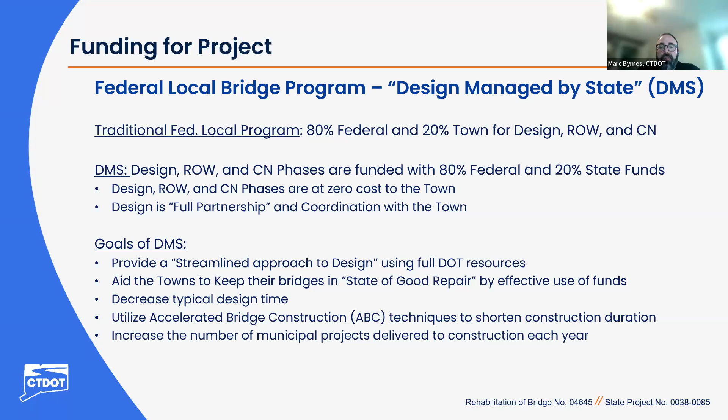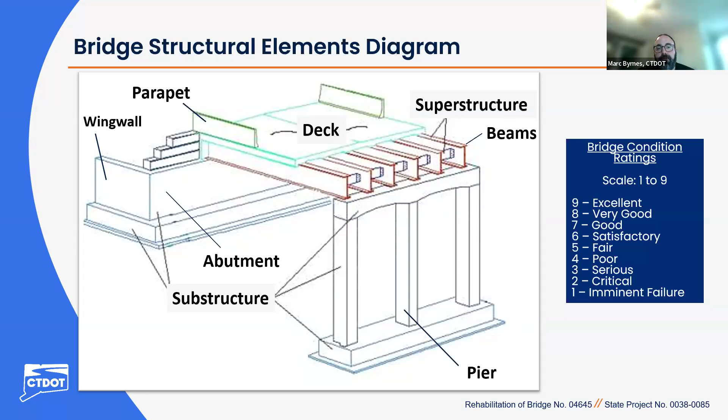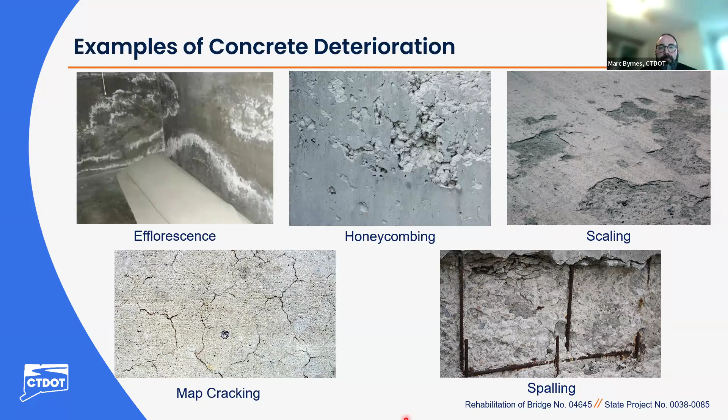I'll now turn over to Deb Richards, first selectwoman of the town of Eastford, for some remarks.

Thanks, Marc. On behalf of the Board of Selectmen for the town of Eastford, I'd like to welcome everyone to the virtual public information meeting for the town of Eastford Ashford Road Bridge Project. The town of Eastford is working in partnership with CTDOT and CHA Consulting for this bridge replacement project. CHA and CTDOT have shown open communication and a willingness to answer all the town's questions regarding this process. I look forward to tonight's presentation and open discussion. Thank you.

Thank you, Deb. I'll now turn over to Steph Dubina for the formal presentation. Steph?

Hi, Mark. Thank you. As Mark noted, my name is Stephanie Dubina. I work for CHA as a consultant liaison engineer on behalf of the Department of Transportation. This is a project that I am working on. And on a personal note, I'd like to say that I am a town resident of Eastford myself, so I am very familiar with the bridge site and the project location. I'm excited to introduce this to the community and just provide an improved bridge for years to come.

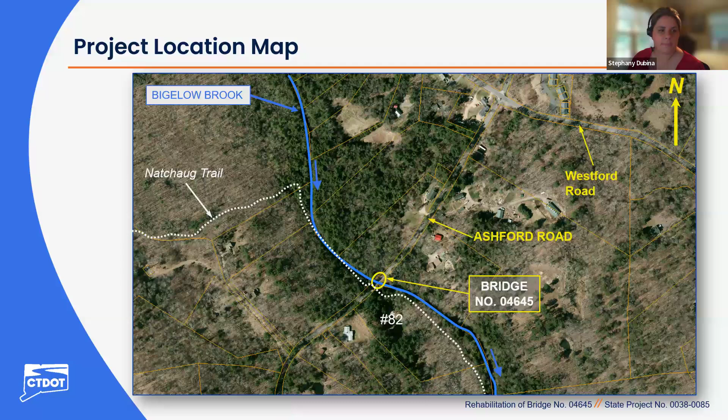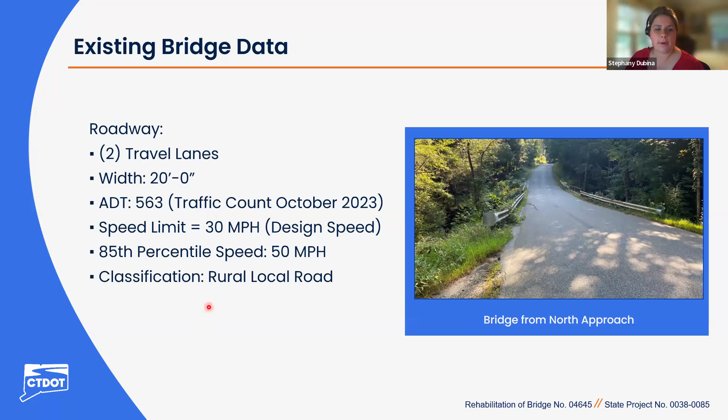With that being said, the 85th percentile speed for this location was calculated to be 50 miles per hour during those traffic counts completed last year. Finally, Ashford Road is identified as a rural local road.

This bridge was constructed in 1937, making it 87 years old. It's a single span structure with a span length of 27 feet, 7 inches. It has a superstructure comprised of steel beams and a concrete deck. Its substructure consists of stone masonry gravity wall abutments and flared stone masonry wing walls.

The bridge is considered to be a large structure because it has a watershed of 24.4 square miles, and because it's a large structure, it also has a 100-year design storm. The hydraulic clear span of a bridge is measured from abutment to abutment. In this case, the hydraulic clear span of this bridge is much shorter than 1.2 times the bank full width of the channel, which is 51.6 feet.

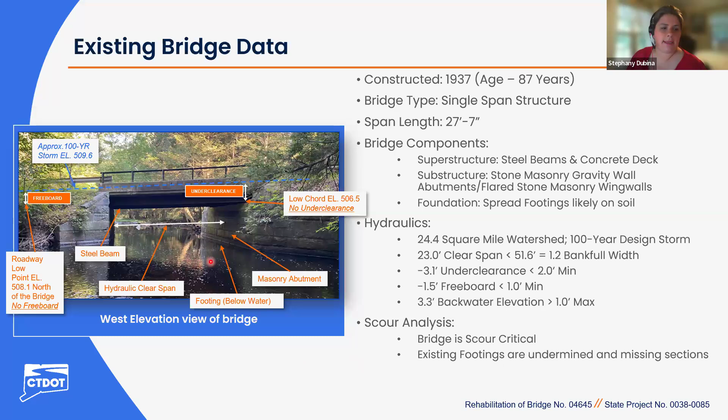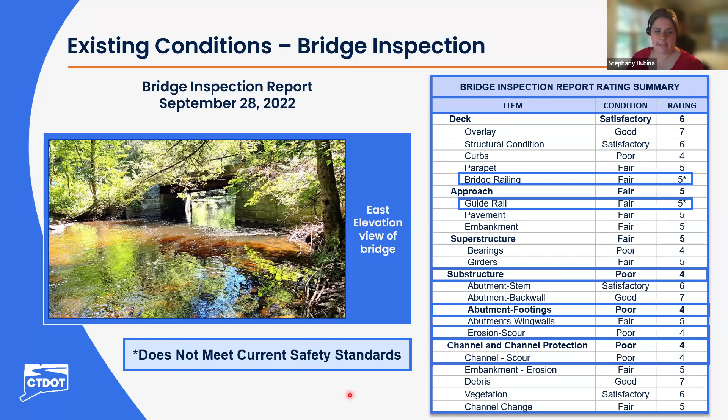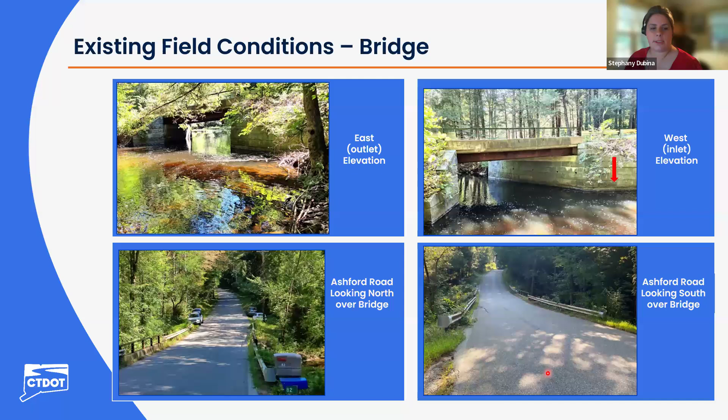This top left photo shows the underside of the bridge deck, showing the steel beams and the masonry wall abutment. This top right photo shows the deterioration of the concrete curb at the west fascia. This bottom left photo shows the north stone masonry abutment and the concrete bridge seat. This bottom right photo shows the steep southeast approach embankment, and you'll see voids within the masonry behind the wing wall.

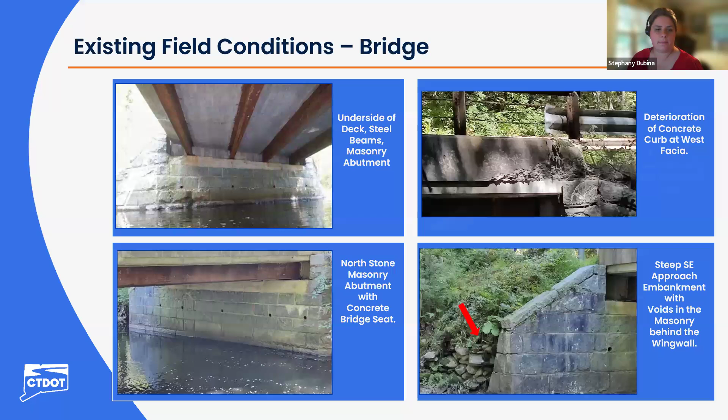This top left photo is a photo of the Natchaug Trail on the west side of Ashford Road, which runs along the southern bank of Bigelow Brook. This photo is the driveway of house number 82, which is located immediately southeast of the bridge and abuts the Natchaug Trail, highlighted with this red arrow here.

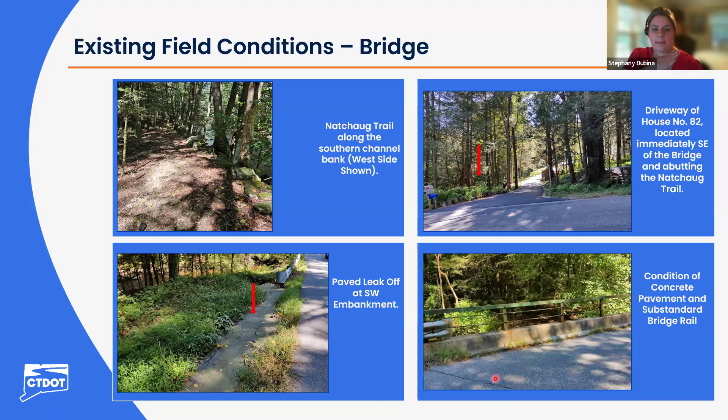This bottom left photo shows a paved leak-off at the southwest embankment, and this bottom right photo shows the condition of the concrete pavement and that substandard bridge rail. And finally, this is an upstream channel view of Bigelow Brook looking west, and this is a downstream channel of Bigelow Brook looking east.

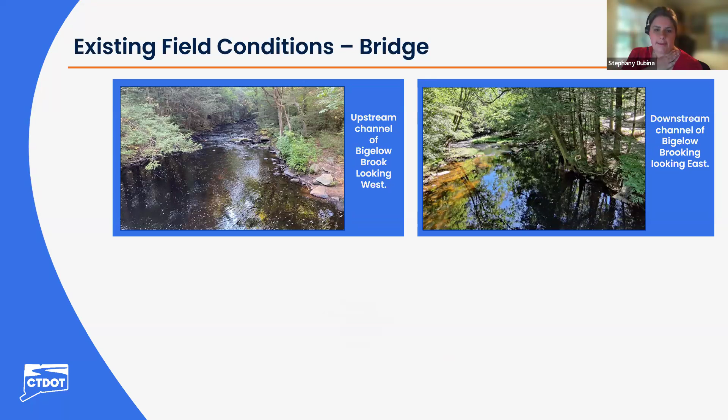As we reviewed the existing conditions and came up with preliminary engineering for this project, we came up with a purpose and need statement. The statement includes the following.

We wanted to address the poor condition of the substructure, increase the roadway width to 22 feet to meet FHWA standards, eliminate the scour critical condition of the bridge, replace the bridge and approach railing systems to meet current safety standards, improve the hydraulic adequacy and hydraulic performance of the bridge, and finally, the bridge has exceeded its 75-year service life.

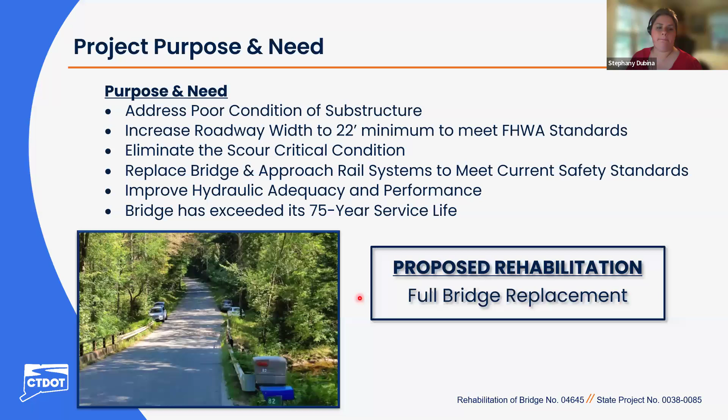With that, it was concluded that the proposed rehabilitation should be a full bridge replacement. We'd also like to note that, like Mark said earlier, despite the deficiencies, this bridge is considered safe for the traveling public, and it is regularly inspected by the DOT.

The proposed structure is a new pre-stressed concrete deck unit bridge. It will have a 75-year service life with minimal maintenance. It'll carry AASHTO design, legal and permit vehicles with no weight restrictions. It'll provide abutments and flared wing walls that are founded on bedrock, so there's no scour concerns.

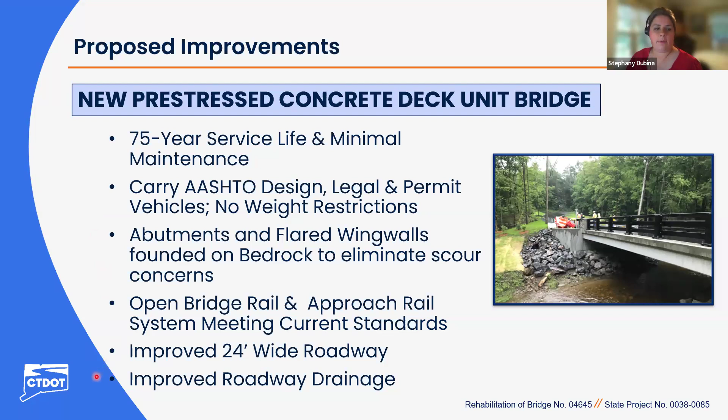It'll provide an open bridge rail system and approach rail system to meet current safety standards. It'll have an improved 24-foot roadway with improved drainage features.

The proposed project will also have a number of hydraulic performance improvements. The span of the bridge itself will be widened to 58 feet 6 inches, which provides that 1.2 times bankfull width for a clear span of 52 feet.

The roadway profile will be raised by 1 foot. The increased underclearance will be provided with the passage of the 100-year storm, so it'll be increased from negative 3.1 feet to 0.4 of a foot. It'll also provide improved freeboard, so there will no longer be roadway overtopping during a 100-year storm, going from negative 1.5 feet to 1.9 feet. It'll also reduce the backwater elevation from 3.3 feet to 0.4 of a foot. Finally, the scour deficiency will be eliminated with those foundations bearing on bedrock.

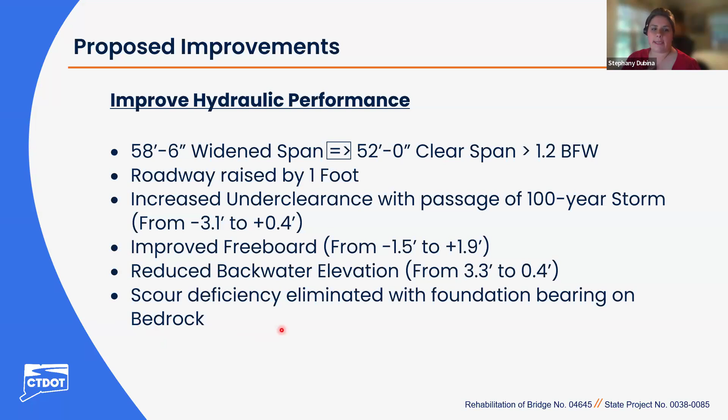Here are some aesthetics for the proposed bridge. These are some examples in the photos. They will have a concrete form liner to simulate stones. This is an example of a wing wall with that form liner, and this is an end block with another stone form liner. It'll also have a metallized bridge rail of the color of the town's choice. In these examples shown, they're black.

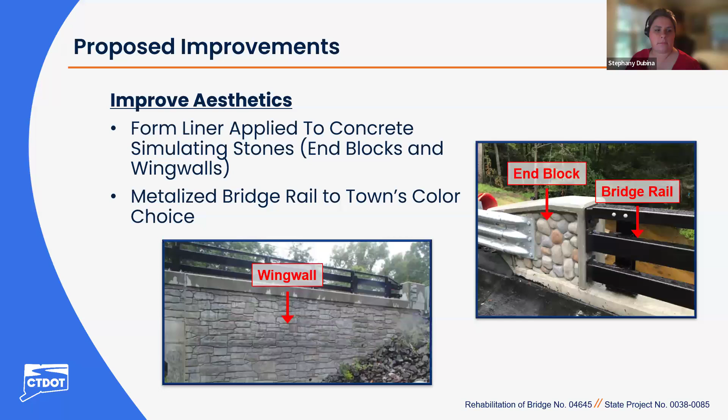Our recommended alternate is that pre-stressed concrete deck unit bridge. This is a cross-sectional view of the bridge, showing what it would look like if the bridge were cut in half. The proposed superstructure is comprised of 7 18-inch deep pre-stressed concrete deck units with a 6-inch topping slab. It'll carry 2 12-foot travel lanes with a curb-to-curb width of 24 feet in total, and provide that 3-tube curb-mounted bridge rail system attached to the bridge's fascia.

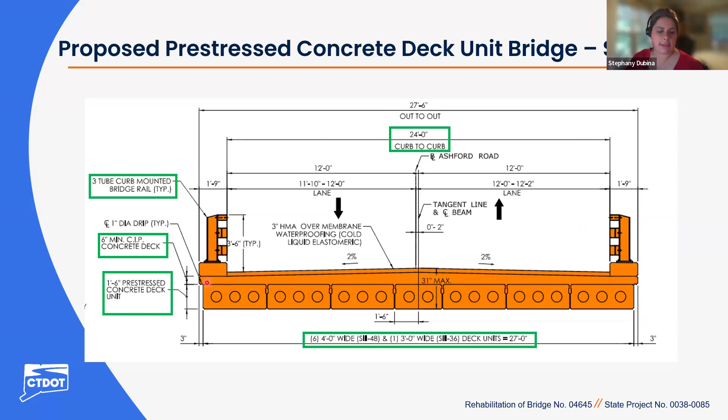This is a plan view of the bridge. North is pointed up and to the right. The roadway in this plan is from south to north, and Bigelow Brook flows from west to east. The orange represents the pre-stressed concrete deck unit bridge that has a clear span of structure span of 58 feet 6 inches and provides a hydraulic clear span of 52 feet total. The yellow represents the reconstructed portions of Ashford Road, and the gray represents the proposed flared wing walls that will be set on bedrock located upstream and downstream of the bridge.

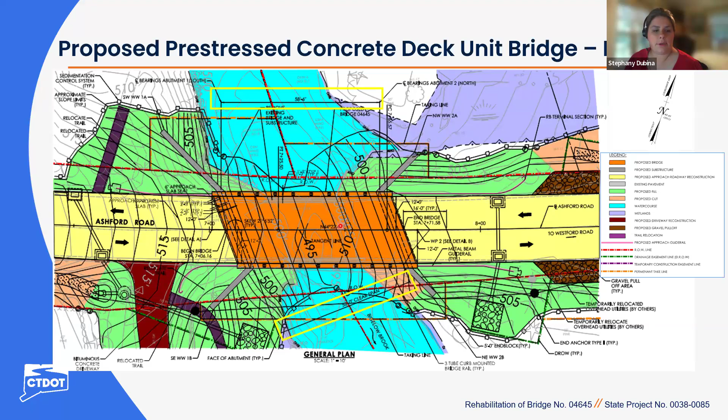This is an east elevation view of the bridge. Again, you see that 58-foot 6-inch overall span. The orange represents the pre-stressed concrete deck units with the open bridge rail. The gray are the wing walls with spread footings founded on bedrock, and any exposed abutment sections will have that stamped concrete form liner to simulate stone masonry. The pink represents the guide rails.

Highlighted here in green, you'll see that 100-year storm elevation, located below the beam's low chord elevation, below the bridge, and below the roadway low point, which gives a hydraulic underclearance of 0.4 of a foot and freeboard of 1.9 feet during the 100-year design storm. So there will be no overtopping of the roadway, and the backwater elevation will also be improved to 0.4 of a foot. Overall, this is a great improvement over existing conditions, which is the main reason why this pre-stressed concrete deck unit bridge was selected for this site.

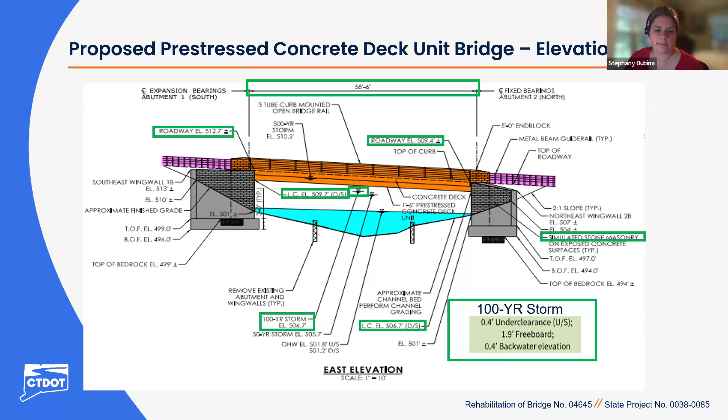This is a proposed roadway plan of the site. Again, north is pointed up and to the right. Ashford Road runs from south to north, and Bigelow Brook flows from west to east. The orange represents the pre-stressed concrete deck unit bridge, and the yellow represents the reconstructed portion of Ashford Road, which is approximately 385 feet. As part of this project, drainage improvements are proposed along Ashford Road, including some catch basins and drainage swales.

There will also be improvements made to the 2 gravel pull-off areas located north of the bridge that are used by anglers and hikers. The entrances to the Natchaug Trail from the roadway will be slightly redirected to provide the space needed for the proposed wing walls and guide rails that are necessary. A crosswalk is proposed at the bridge's south approach to provide access for pedestrians using the trail and crossing the roadway.

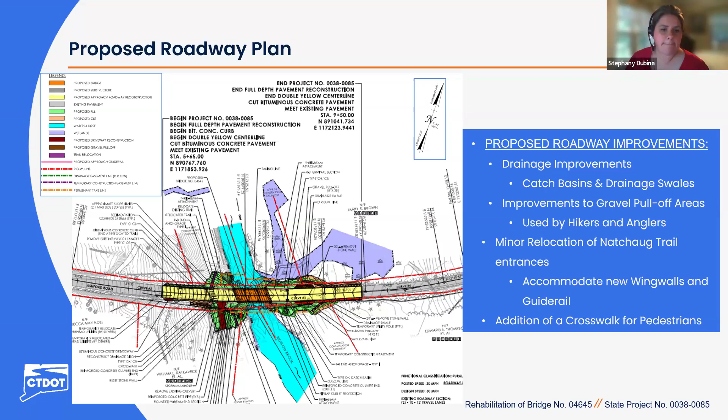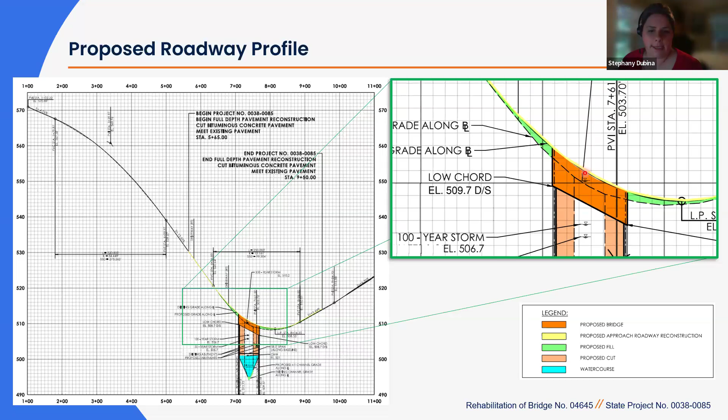This is a profile of the roadway. We are proposing a 1-foot raise in the roadway profile, and that's to improve the hydraulics. We can only propose a 1-foot raise due to the constraints of the driveway at house number 82.

There will be no difference in response by the Eastford Independent Fire Company to emergencies north of the bridge. The Eastford Fire Company and the Ashford Fire Department, located southwest of the bridge, will cooperatively respond to any emergencies on Ashford Road, located south of the bridge.

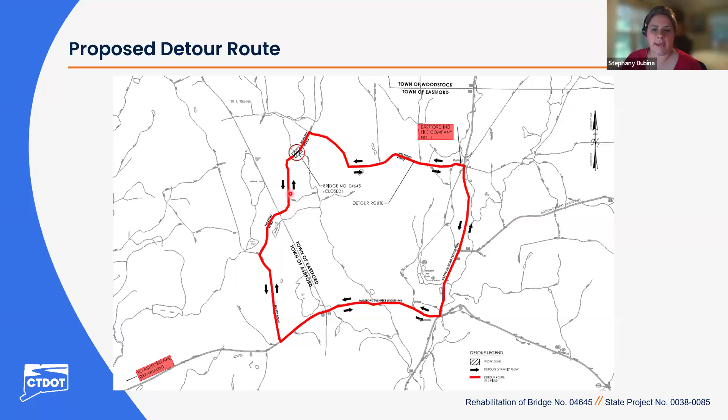Looking at environmental impacts, there will be some temporary and permanent wetland impacts. There will be some tree clearing along the roadway. Best management practices will be maintained for the fish and wildlife during construction.

We are proposing an improved pull-off area for anglers and hikers. We are coordinating with the Connecticut Forest and Park Association and abutting landowners for any work on the Natchaug Trail. Best management practices will be met during construction as this is within a public drinking watershed. Finally, phase 1 archaeological studies are underway for this site.

We do anticipate some environmental permits, one being the Town of Eastford Inland Wetland Permit. Also the Connecticut Department of Energy and Environmental Protection Flood Management Certification Memo of Understanding, and the U.S. Army Corps of Engineers self-verification notification.

Utility impacts that are anticipated are that the overhead utilities located on the west side of the roadway will be temporarily relocated during construction.

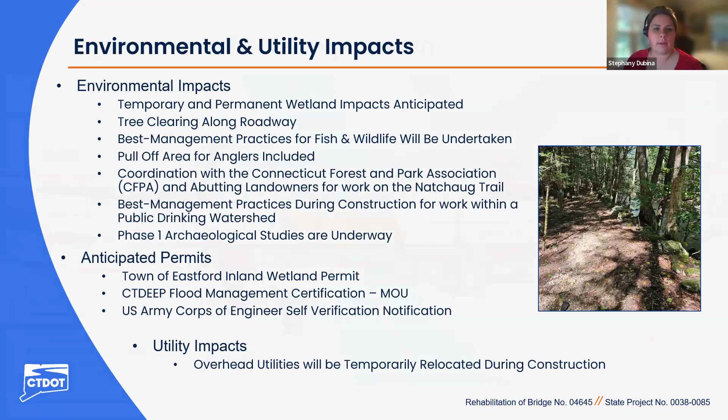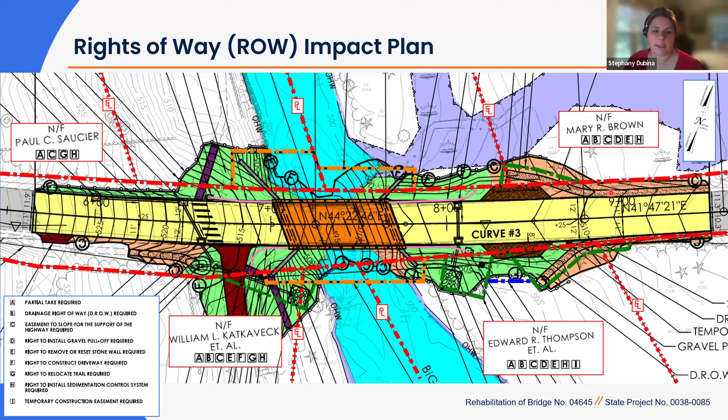I'm now going to pass it along to Kathleen Erickson from the department's rights-of-way unit to go through the rights-of-way process.

Thank you, Stephany. So again, my name is Kathleen Erickson, and I'm an assistant project coordinator with the department's Division of Rights-of-Way. Our office is responsible for acquiring the property rights that are needed for transportation projects in the state. As mentioned previously, this project will require the acquisition of property rights.

So I just want to give you a brief overview of our acquisition process. However, before I get further into that, I would like to mention that the specific property impacts for this project are still being finalized, and they may change as the design progresses. Also, any required property rights will be acquired in accordance with Connecticut General Statutes Sections 13A-73 and 13A-98E, as well as the Uniform Act. If you go to the next slide, please.

Next, our office will determine the fair market value of those property rights, which will be used to establish an offer of just compensation. That offer will be sent out to the property owner in writing, and a right-of-way agent will be available to meet with the property owner to explain the project, go over the specific impacts to their property, and to explain the state's offer.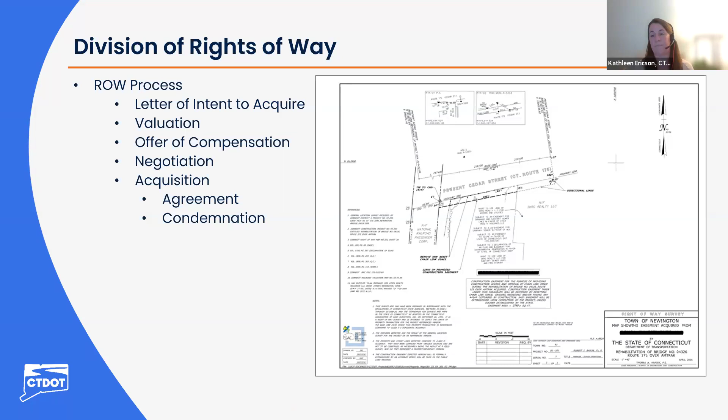Thank you, Kathleen. So now I'd like to just summarize my part of the presentation with the project schedule.

We're looking to start construction in the spring of 2027. The construction duration is 1 construction season, which is approximately 8 months. The estimated construction cost is $4,410,000, and that's with 80% federal funds and 20% state funds, with no cost to the town of Newington. I'd also like to note that the cost and the schedule are still preliminary, so they may change as we move forward with the design.

With that, that concludes my portion of the presentation, and I'm going to pass it over to Michelle Rame from the Department of Transportation to continue.

Thank you, Stephanie. Great job. So it is now time for the question and answer portion of the presentation.